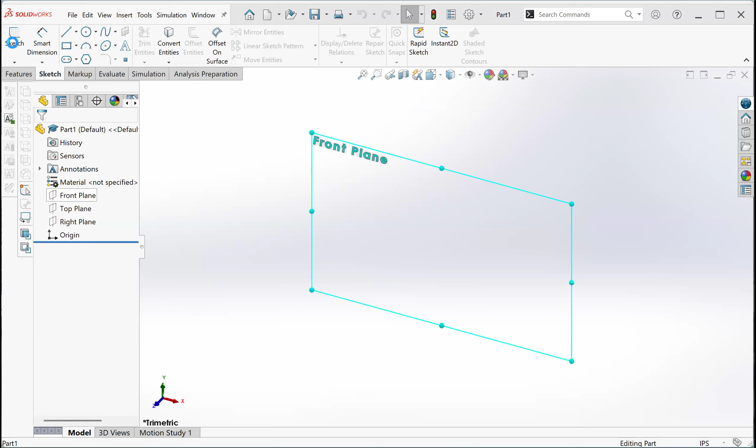So we're going to start with the tennis ball on the front plane. I go ahead and sketch. Because the tennis ball is a revolve, we start with the center line, and we're going to measure this for 4 inches.

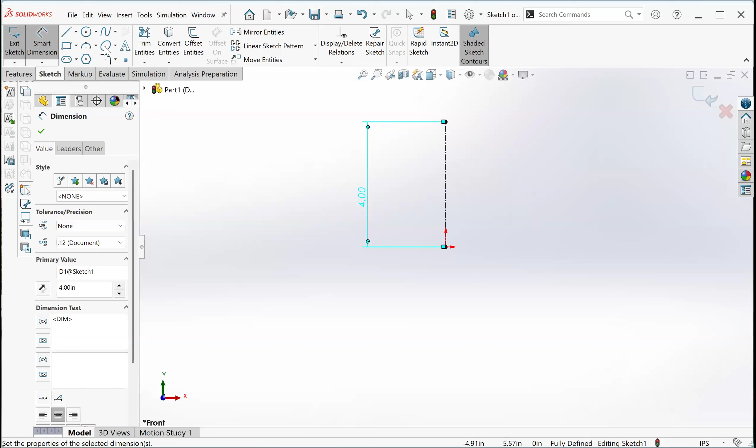We'll be using our center point arc. Under the arc tools, you can find center point arc, meaning you know where the center of your arc is. So I'm going to click my center here. The first click is the start, the second click is the end. So here we have our arc.

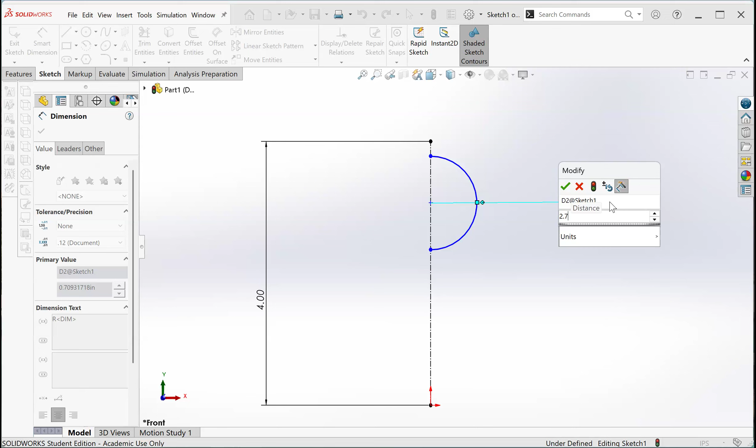I'm going to measure for 2.7, that would be the diameter of the tennis ball in inches. And because we're measuring a radius, we're just going to write divided by 2, and SolidWorks will automatically figure this out. So as you can see, this is the size.

I'm just going to grab the top and click it on here. So this turns black, and I'm going to close the form. For the base, I feel like I don't have enough space. I might just change this to 5 inches, so it shifts the rest of it up, and we have enough room to create a base.

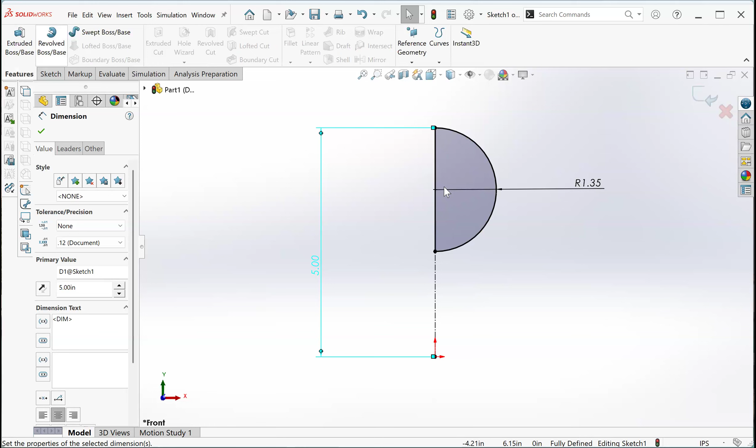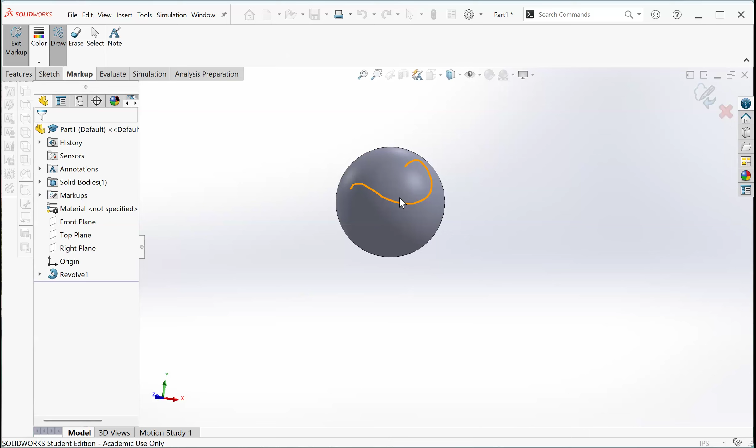We need to come in and create a groove, the tennis ball groove that looks like an 8 that wraps around. Because this form is curved, we can't sketch anything on there directly, and it's a bit harder to draw in 3D. So we're going to actually create a plane on the outside and use a slot form, then basically wrap that around the form.

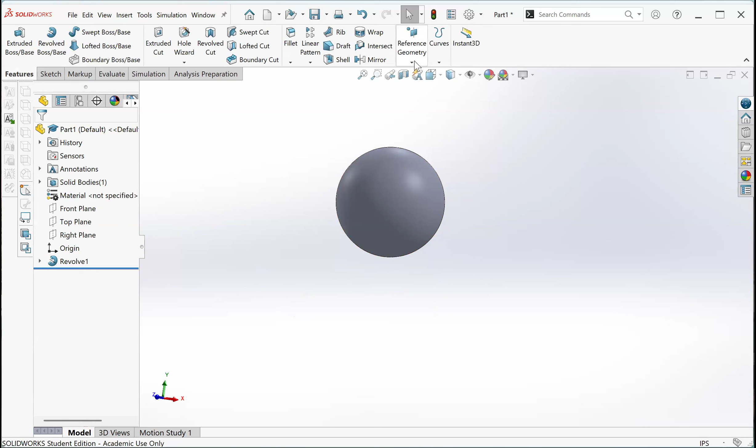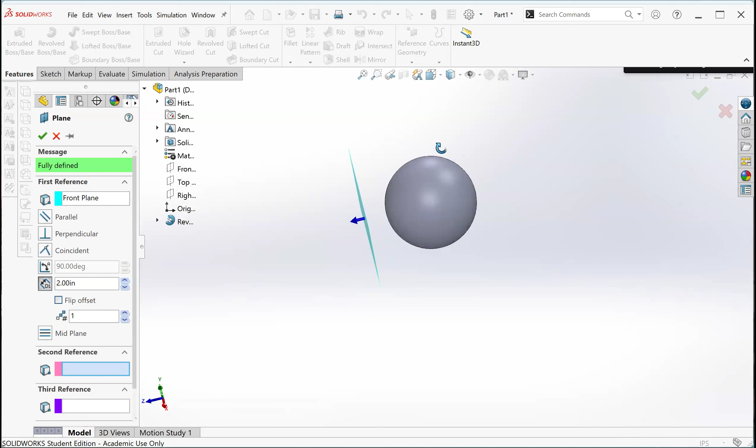So we go ahead and start with a new plane. This plane has to be outside of our shape. I'm going to press plane, and as a reference, I'm going to open up and look at the planes. Either the front or the right plane will do. I'm going to use the front plane, grab it, and I'm putting 2 inches. As long as it falls outside of the form, we are okay.

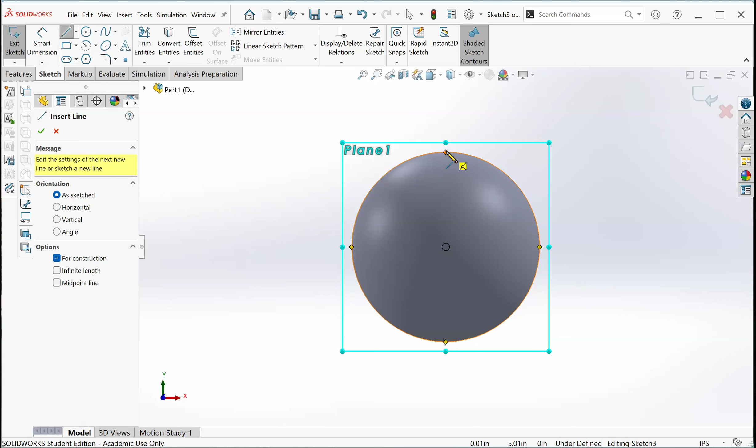Now we'll use this to sketch. I need to find out where the center point of this form is. To do so, I'll use a center line and go from top to bottom. As soon as I come to the edge, you can see that all the sides show, even the center shows, but you need to have a line to be able to click to.

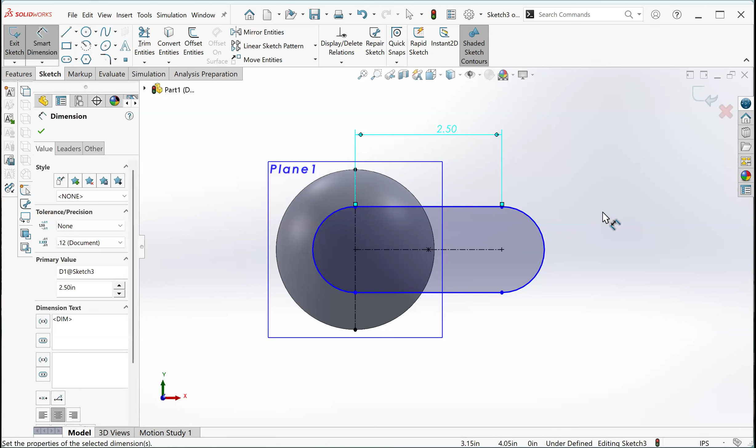Next, we're going to use our straight slot form, which is a pill shape. I'm going to hover over the middle point until I see the midpoint, and use a horizontal line to stretch it out, and click one more time for the radius. We'll measure this: the top would be 2.5, and the radius will be 1 inch.

All right, now that we have this form, we're going to use the sketch and basically project that form on that surface. To do this, we'll go under Insert, Curve, and find a split line. So Insert, Curve, and Split Line.

When you get here, there are 3 options. You can do Silhouette, Projection, and Intersection. Usually projection is a default choice. First question is, what sketch or line would you like to project? Second one is, on what surface?

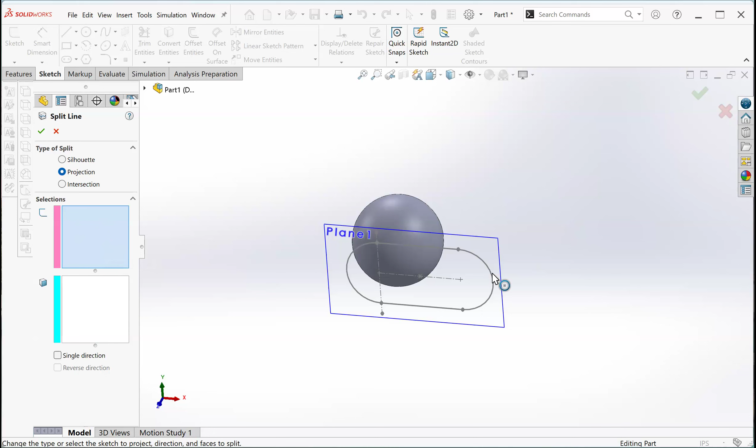For the first option, we pick our sketch. For the second option, we pick our sphere. Now it will lay this on top of that. Press check, and you can see how now it split that face into two pieces. I'm going to hide this plane so it doesn't bother me by clicking this eye. So now we just have this ball.

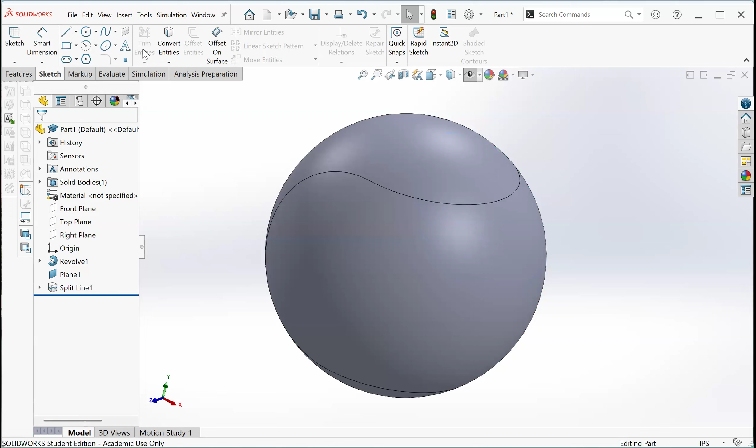So I want to use this path to create a groove. As you can see, it's segmented. So if I come and use a sweep cut with a circular profile and pick it, it would only pick a segment of it. I can't pick more than a segment, right?

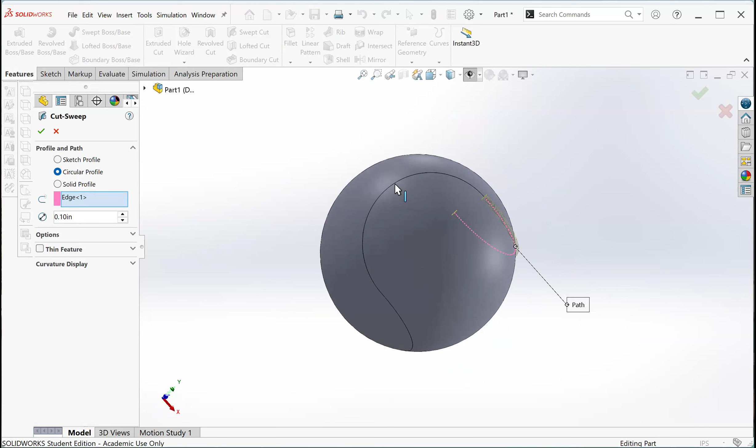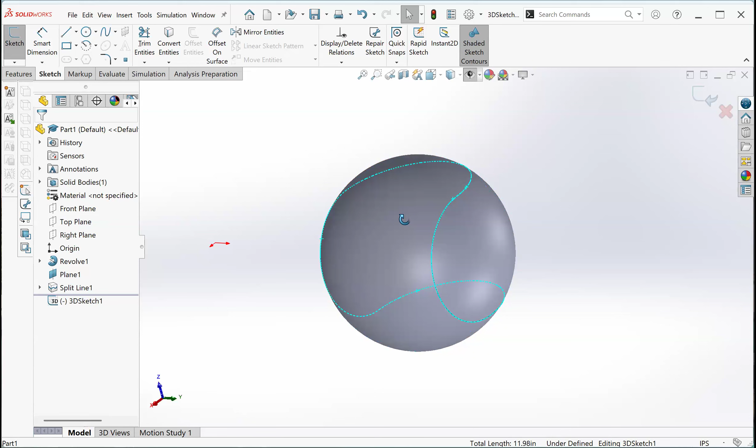To actually make this into one sketch, we're going to use a 3D sketch, select all of these, and convert them into a 3D sketch. So I'll come out of this tool, go ahead and insert 3D sketch. Here, all we're doing is selecting this line by holding shift, we add to it, and go all around to pick this whole thing. Once we have it selected, we go up on the top, convert entity, and it creates a full sketch. Now finish and come out.

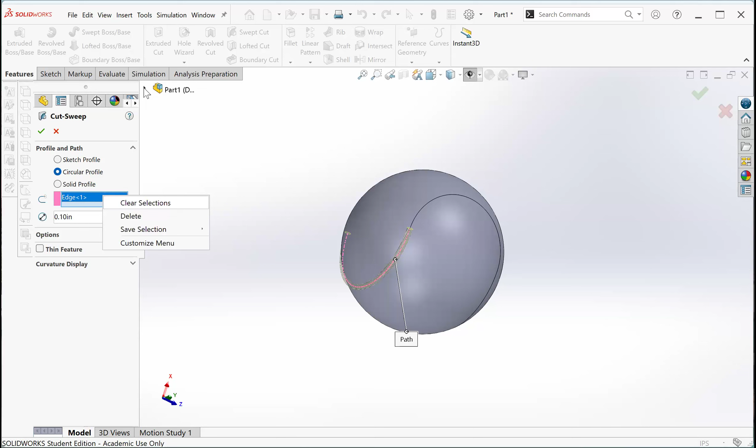Now this time, we're going to go back to the sweep cut and pick circular profile. Here, again, if I pick an edge, it will not work. So for this, we're going to open up the tree of the part file and pick from the menu, pick the 3D sketch. So now you can see it's cutting through all the way. It's a 0.1 cut. Looks good.

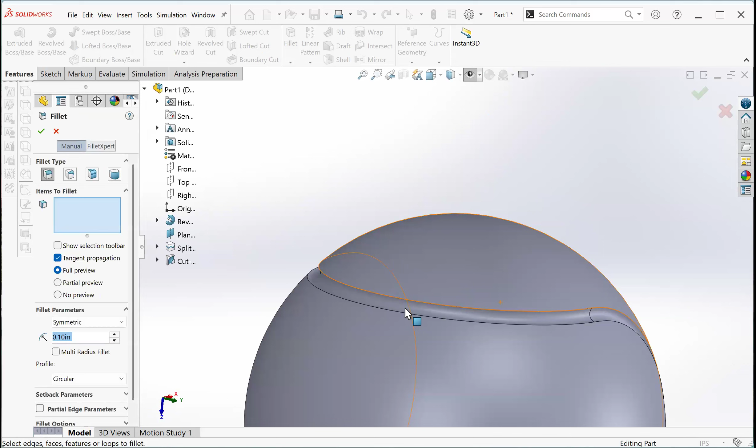I'm going to press check and kind of check this out. It needs a bit of a fillet because it looks very sharp. So once I press fillet, the fastest way would be to pick the face inside because it touches both edges. And then it has a 0.1 fillet.

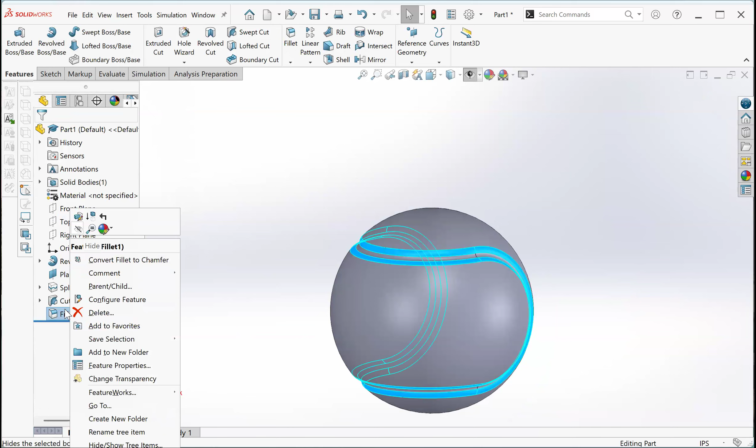It might be too large, so I'll just go back and make it a 0.05 fillet.

0.05, so that's about half. That looks better. I think I hit everything by mistake. Here we go, now we have our tennis ball form.

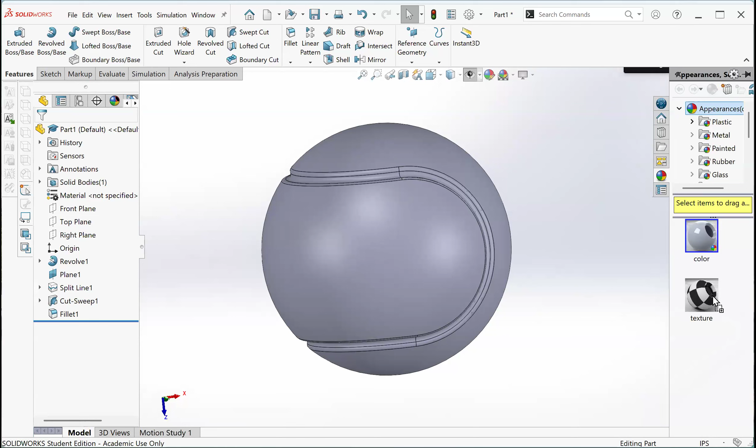I can go ahead and add a color right now just so you guys can see. I'm going to go to the right side to the appearances, and under that there is materials. So under plastic, I can find probably like a yellow. Once you drop the color on, there's face, feature, body, and whole part. I'm going to just do the face because we have a white line in the middle.

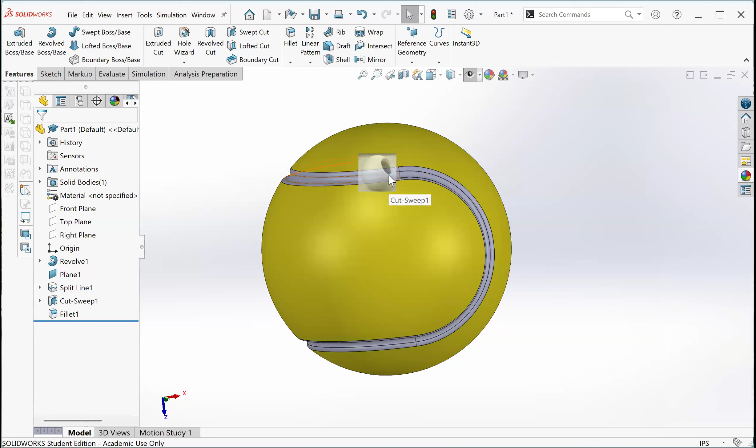And for the middle part, let's see if I can find a low gloss. Here we go, soft. And here, if I pick a face, it only picks that face. But if I pick a feature, it picks the groove. If I pick the body, it actually does everything under the other faces as well, so it also does the fillets.

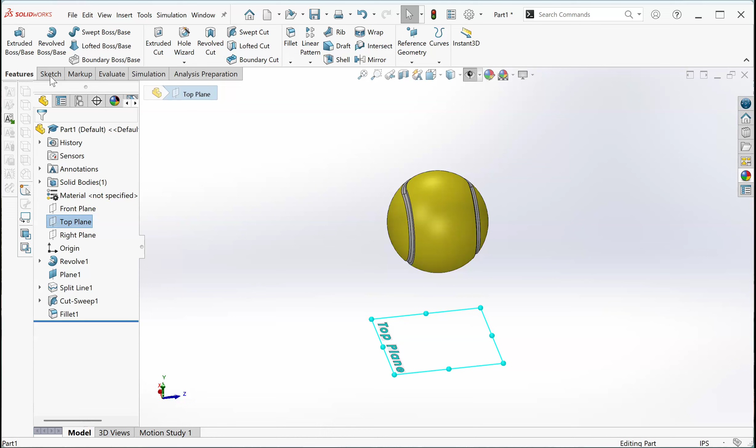All right, so now we have our tennis ball. We're gonna create a base for it. If I look at my top plane, it's still sitting here. So I'm going to create a circular base here, to use the edge to create a spiral spring that's tapering open. So we'll do a sketch and use a circle to measure it for 2 inches.

Actually, maybe, yeah, let's try a 2.5. That's better.

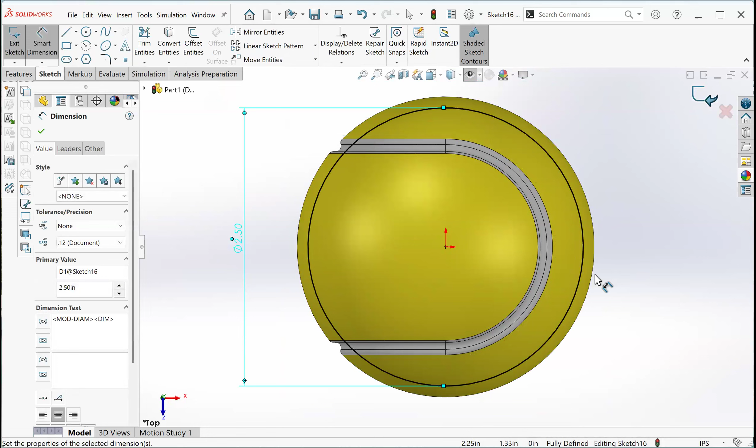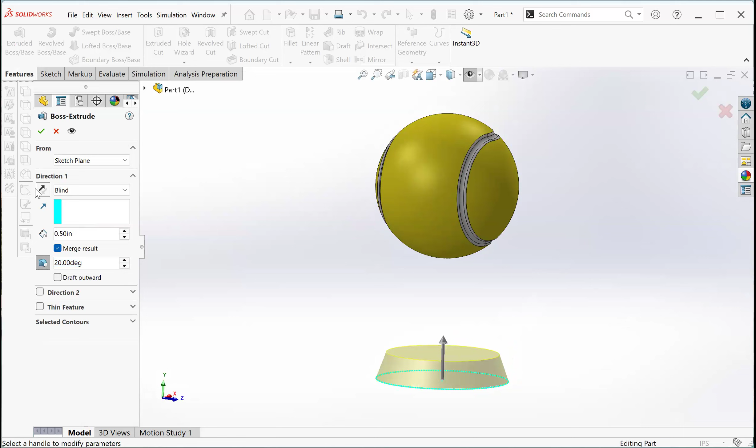Now I'm going to extrude this with a slight draft, so a 1/2 inch extrusion. And we'll add a little bit of a draft so it kind of looks like a base that has a more stable standing. So maybe just a 20-degree draft, and press check. All right.

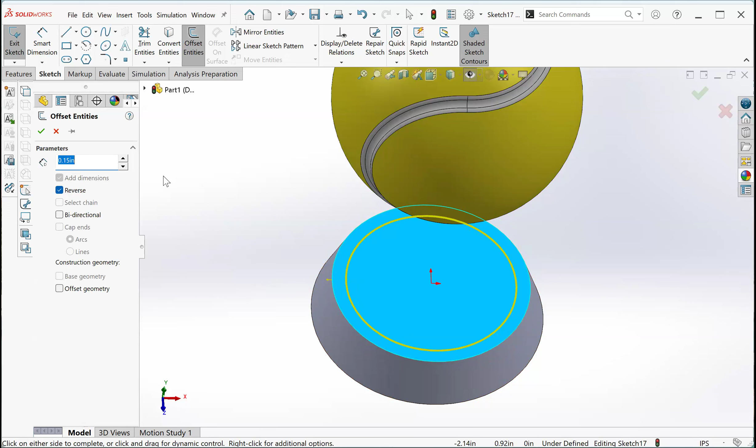So the reason we built this is to use the edge to create our base for our spiral. We're going to go on top of here, do a new sketch, and while it's selected we'll use the offset entity, basically picking that edge to offset from. We want to go on the inside, check reverse, and change the number to 0.15, so it goes slightly more, because when we create our sweep that's going to be in the middle of it. So we need a little bit of room for the fillet and a little bit of room for the sweep. We can even do more, can even do 0.2, but I think 0.15 we'll just do.

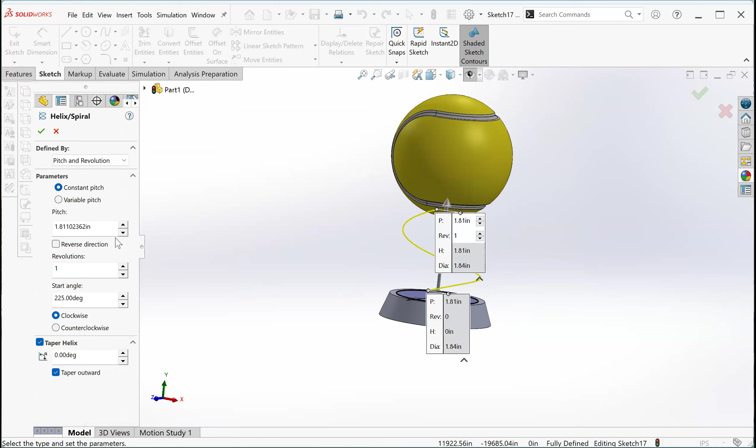Now that we have our circle, while we are in the sketch, we're going to go under Insert, Curve, and Helix Spiral. You can see it pulls up a spring out of that circle. This is dimensioned either by pitch or height, so I'm going to take my pitch to 1. Pitch is the spacing between one revolution and another. And we count the number of rotations, number of revolutions. So I'm going to keep going up until it feels like it's going to wrap around the ball.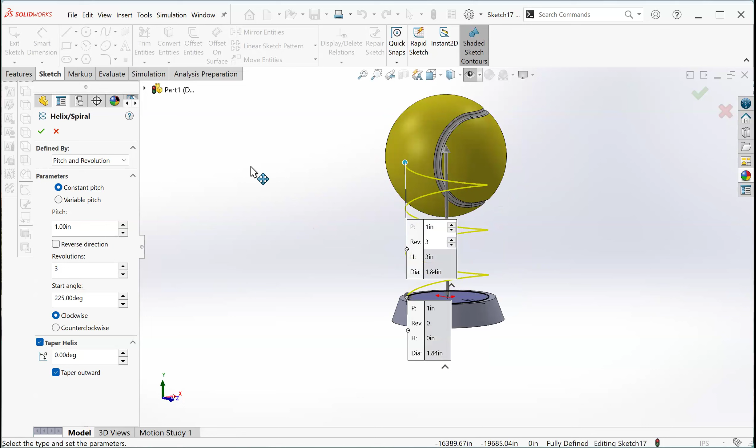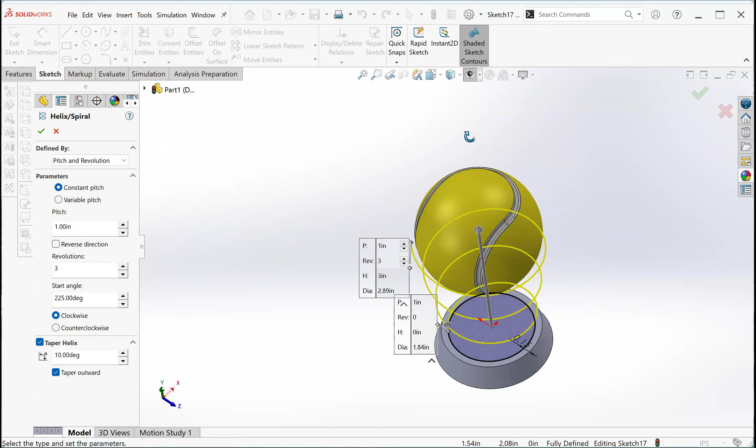As you can see, it's going inside, so we want to use the taper helix. Make sure you have the taper helix checked. And I'm going to go up in the number until it feels like this ball can sit in. I'm trying to leave a little bit of a gap, so maybe 10 degrees will now look better. So when we come in and sweep, there will be a thickness here that the ball can sit on. All right, that looks good.

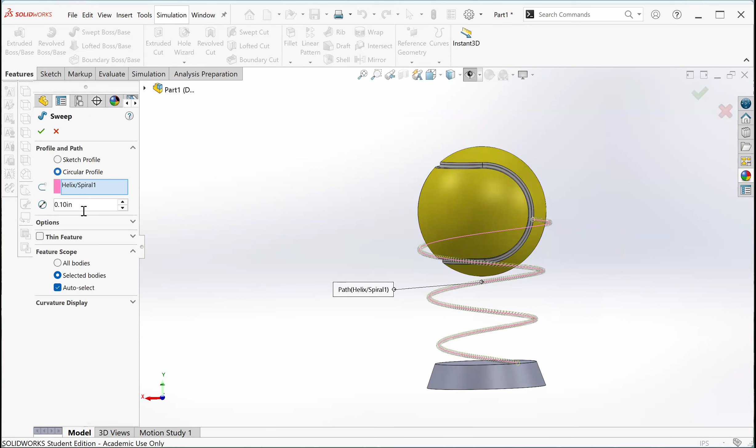That looks like it'll be grabbing, and we have 3 revolutions. Press check, so this is just our path for our sweep. Now we go to the feature and use our sweep, circular profile, and this is a 0.1. I should go to 0.15, slightly thicker, to give it more emphasis.

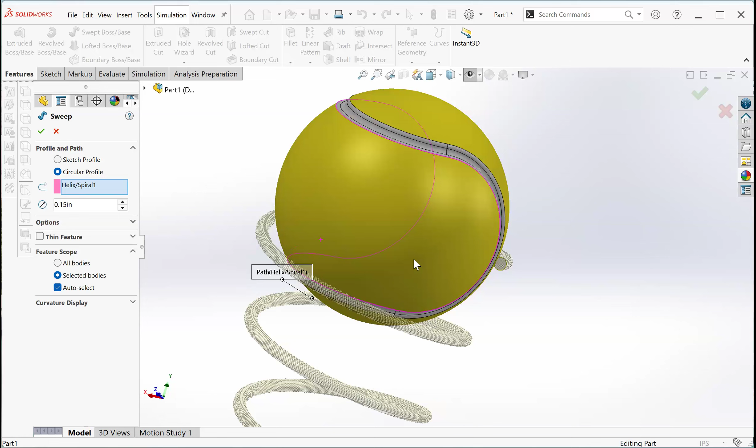I can go back and change the degree slightly so it doesn't feel like it's gonna fall. Even if it does, it will stop somewhere here because this is starting to get smaller and smaller. So one thing with the sweep to pay attention to: this end looks very funky. We're gonna go under options and select align with end face. Let's check. Now we have this nicely.

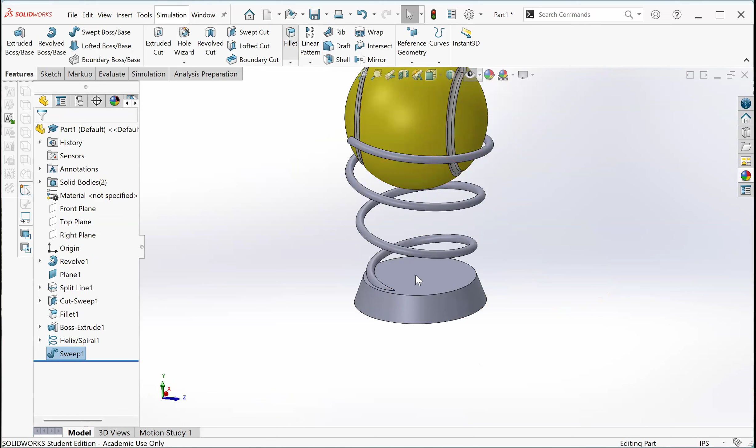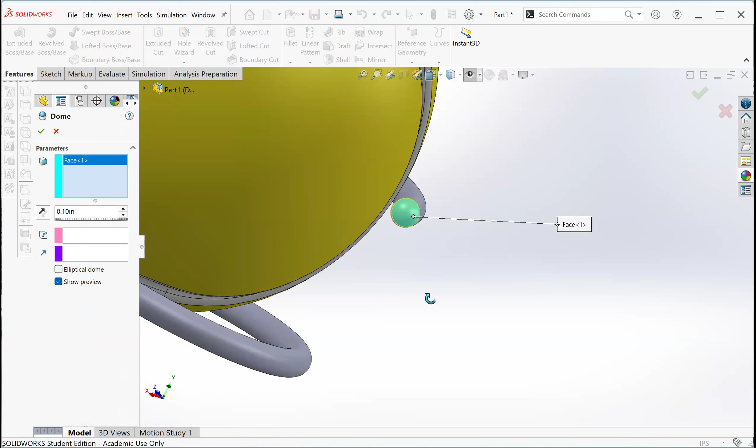We're gonna come back with fillets. Fillet these for 0.05. We have 2 options for this, either a fillet or I'm going to show you guys the dome feature under insert, feature, dome. This takes a surface and kind of domes it up. So if I pick this, you can see it's doming this up. I'm going to use my radius, which is 0.15 divided by 2, so it's 0.075, I think. That looks like a very smooth tangent curvature.

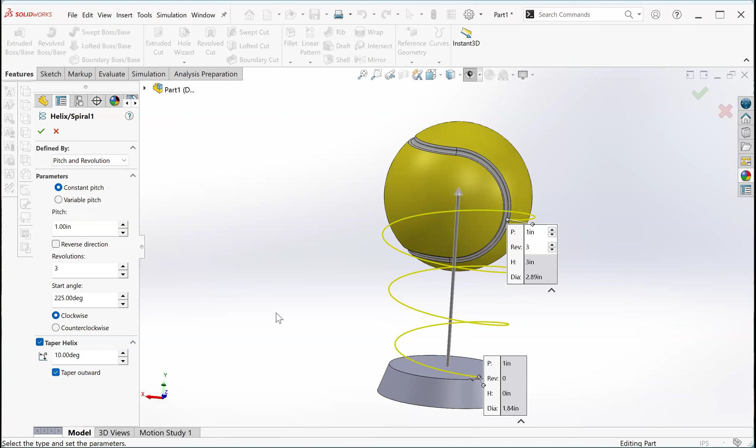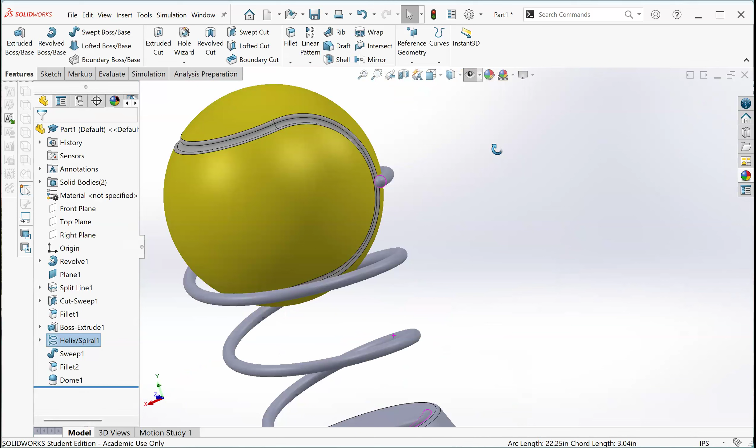Let's check. All right, now if I want to come back to my helix and edit that degree, I can make it 9 and check again. Too much, right? This goes on the inside. So when I go back, maybe, I wonder if we can do 9.5. Let's try that. This is perfect, it looks like it's gripping it. And it will probably come lower still.

So now we'll just color the outside and we'll be done with this lesson. I'm using shift and my arrow keys to do 90-degree rotation to kind of examine it. And here we go, just add a low color, maybe, let's see, maybe a blue.

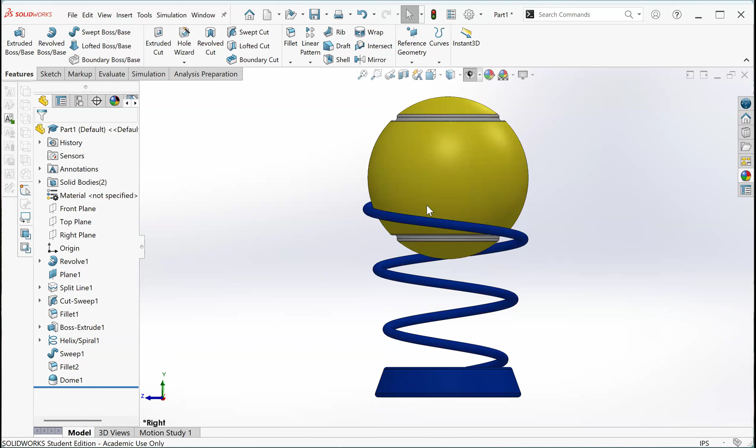There we go, all right. Here's a nice 3/4 view, probably. That side would be nicer. I like this view better so we can see actually the two curvatures in there.

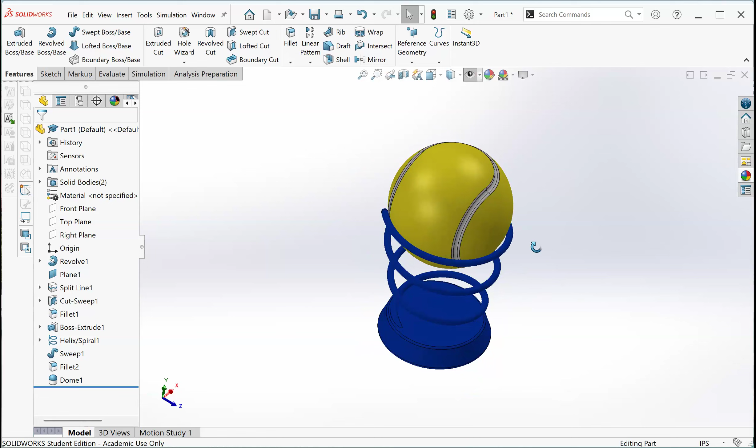All right, we have two solid bodies. We have a revolve. We learned the split line, using a split line for our guide curve, for our guide path for the sweep cuts. Using a circle to create a helix and use that as a path to make a sweep, and doming at the end. Okay, thank you for listening.